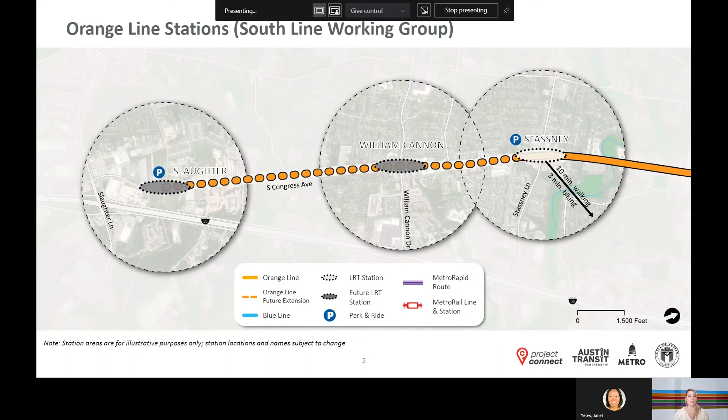After this slide, Janet is going to take over screen sharing and walk you through the engineering schematics for the South Line section. Schematics are a technical tool used by the engineering team to develop the design.

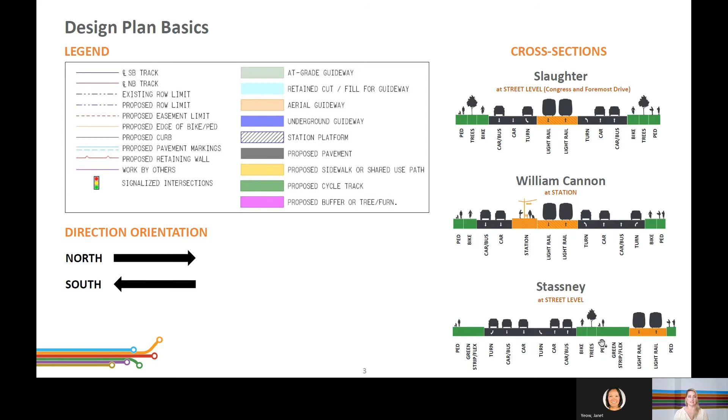All right, so as Gabby mentioned, the beginning of the Orange Line project and the South Line starts north of Ralph Ablanedo Drive. Just to orient ourselves, north is again to the right side of the page, south is to the left.

The northbound tracks are indicated here in the red line, southbound tracks are in the blue. You'll see that the tracks are actually offset from the center of the road, with the Slaughter Station in between the tracks. The reason the tracks are offset from the center of the road is to better integrate with the future park and ride location.

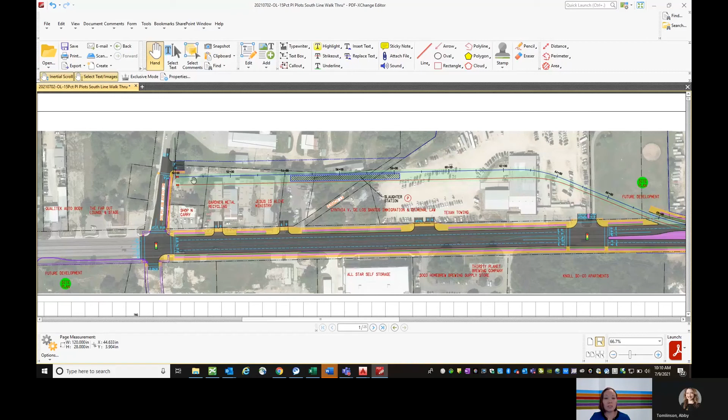Again, the park and ride location is not yet fixed. We are aware of the rapidly changing real estate environment, especially in this area, and that there's a future development on this property. Whenever you see a green circle with a site plan note, this indicates that there is a development already in progress on the properties, for example here and here. So as we move forward in our designs, we are going to adjust our alignment to avoid the future developments as much as we can.

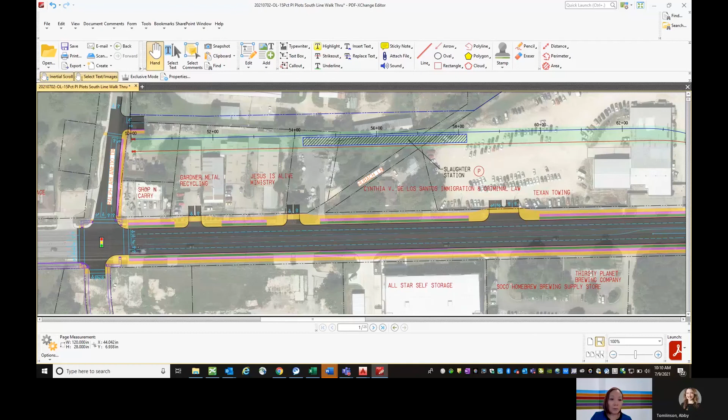On South Congress, you'll see that we are proposing full roadway improvements. However, we will maintain the current lane configuration of 2 northbound, 2 southbound, and a center turn lane.

As we head north on the project, the tracks veer back into the middle of the road. It will be at grade, meaning at the same level as the road. I want to point out that all driveways on the project will be maintained.

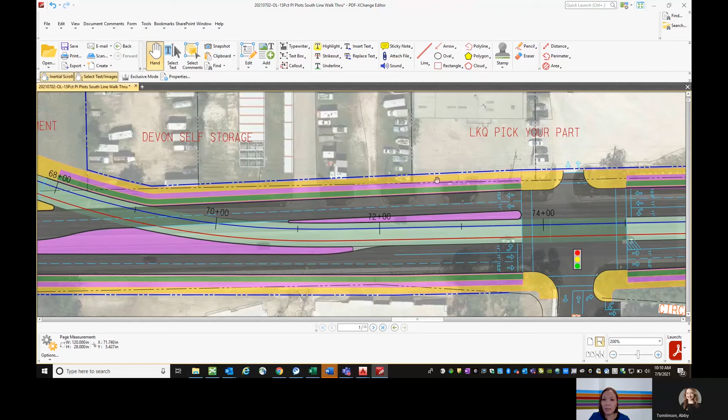In this area, we are proposing a full dedicated bike and pedestrian facility. The green indicates the bike lane, the pink is the tree and furniture zone, and the yellow is the sidewalk. As you'll see in this section, we have a full bike lane, tree furniture zone, and sidewalk on both sides of the road.

So as we head north, the tracks are maintaining at grade in the center of the road. There'll be a signalized intersection at Foremost Drive. Heading north, the tracks remain in the center of the road.

As we cross South Boggy Creek right here, the tracks actually have to raise up to cross over the creek to clear the 100-year water surface elevation. Let's go to the profile to show you. The dashed black line is the existing ground, the blue line is the profile of the track and the roadway. You'll see here that the tracks go up over Boggy Creek. This will be a proposed bridge, and we are elevating to clear that 100-year water surface elevation. The green area indicates retained fill.

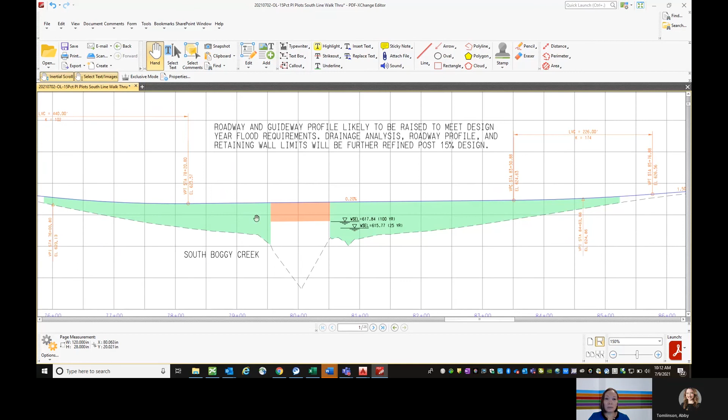Going back to the plan, you will see this red line with a V-notch that indicates the limits of the retaining wall. You'll see it on both sides. As we progress in our designs, we will of course reduce as much as we can the limits of the retaining wall.

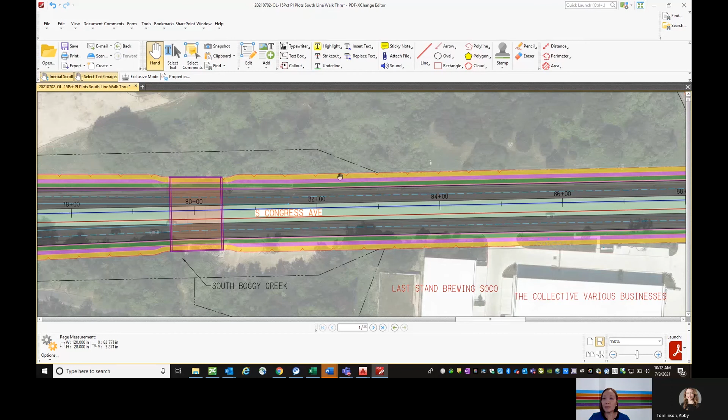We are going to maintain driveway access to this Last Stand Brewing Company and this area. Heading north, Dittmar Road is going to be a right in, right out. This means that cars can no longer cross the tracks. In order for them to access southbound Congress, cars would have to turn right on Congress, head to the next nearest intersection, and make a U-turn.

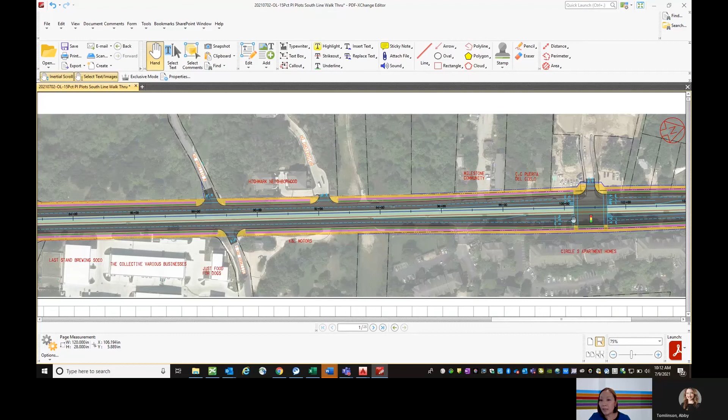The tracks remain in the center of the road at grade. Again, full dedicated bike and pedestrian facilities on both sides of the road.

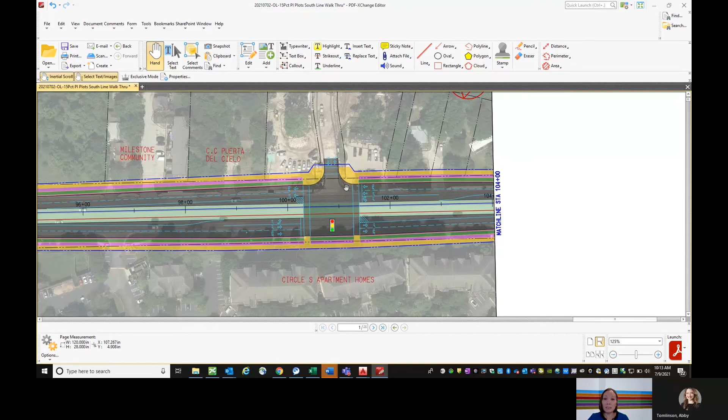At this intersection, we are proposing a new signalized intersection due to a new multi-family development here. Based on our traffic study, there was enough traffic to warrant a signalized intersection, which also provides an opportunity for pedestrians to cross safely.

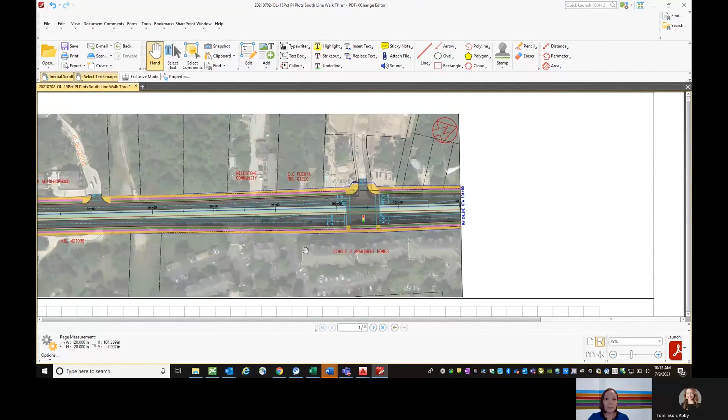Heading north on South Congress, the tracks are in the center of the road with full dedicated bike and ped facilities. Algoin Street is going to be a right in, right out, similarly with Cloudview and Meteor.

So for folks from Centennial Place Apartments who want to access southbound Congress from the northbound side, they would have to turn right on Congress and make a U-turn at William Cannon.

As we head to William Cannon, we are proposing the William Cannon Station. It is going to be a split platform, meaning there's going to be a platform on either side of the intersection, and the footprint widens out to accommodate this platform.

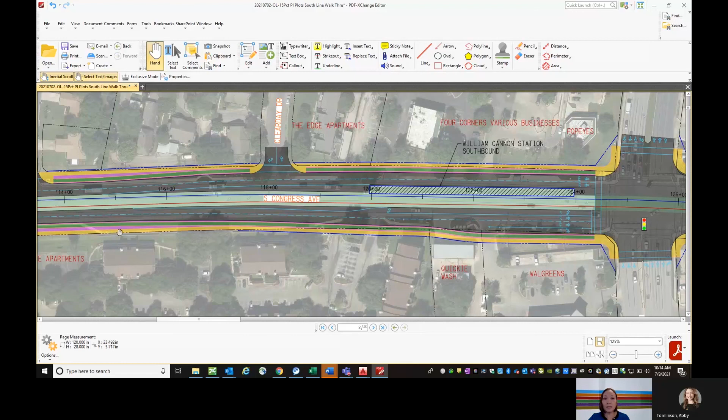In this area, due to this widened footprint, we reduce or eliminate the tree furniture zone, shown in pink, to reduce impacts on the adjacent properties. So here we'll now have a bike lane followed by a 2-foot buffer area, followed by a sidewalk.

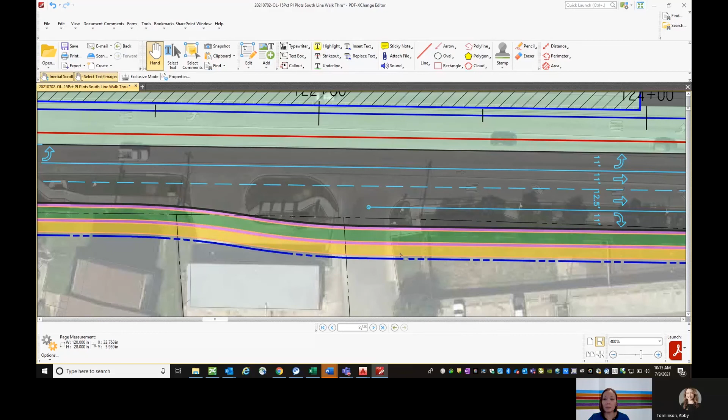To orient ourselves, the Pleasant Hill Library is to the bottom of the page here. Heading north, William Cannon is going to be a full signalized intersection as it is today.

The northbound split platform is indicated here in this dashed box. Again, because we are widening out for the footprint to accommodate this platform, we have eliminated the tree furniture zone, but we will still provide a fully separated bike and ped facility on both sides of the road.

As we head further north, the tracks remain in the center of the road, and we are maintaining full driveway access to all businesses on both sides of the road.

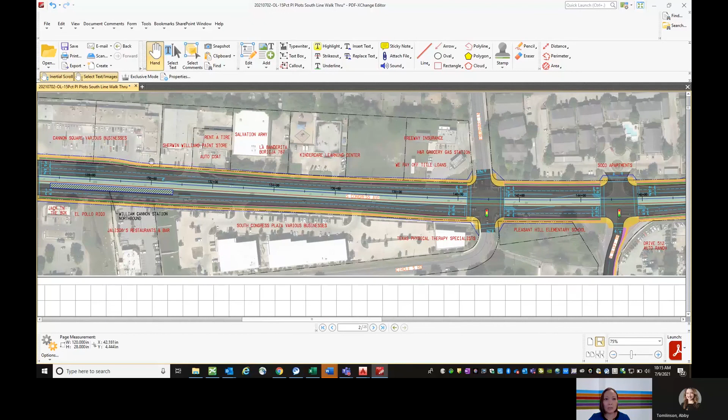Circle S Road is going to be a signalized intersection as it is today. This is Pleasant Hill Elementary School, and another full signalized intersection is being proposed here, with the tracks remaining in the center of the road at grade.

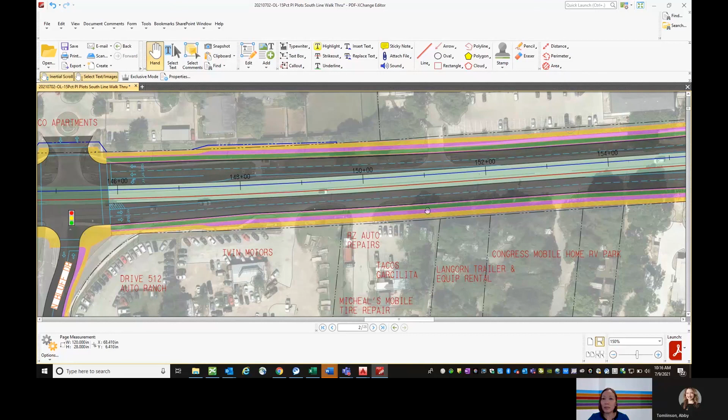As we head north, we are widening back out to provide the tree furniture zone since we have sufficient right of way to accommodate this wider footprint. So we'll have the bike lane followed by a tree furniture zone and sidewalk on both sides of the road.

Tracks remain in the center of the road as we head north. This is Society SoCo, a new development. So just to give an example, for folks from this apartment wanting to head southbound, they can no longer turn left across the tracks. They would have to head north to Little Texas and make that U-turn.

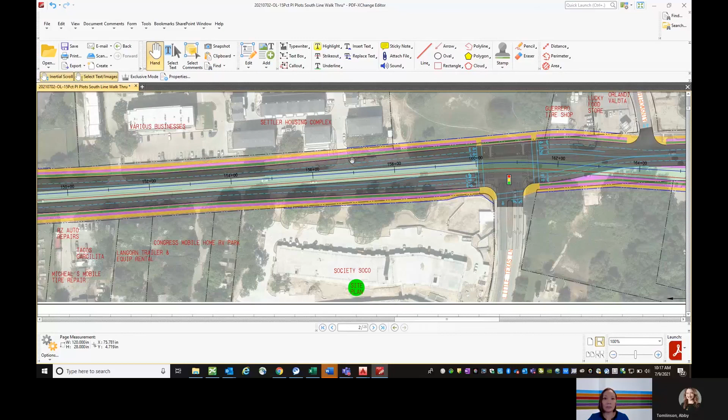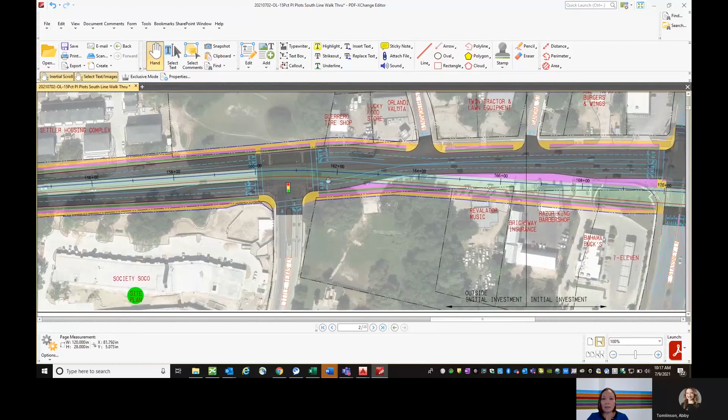Little Texas, we are maintaining the full signalized intersection. You'll see the tracks eventually veer off to the west side, and the reason we do that is to better integrate with the park and ride that we are proposing in this corner between Congress and Wasson.

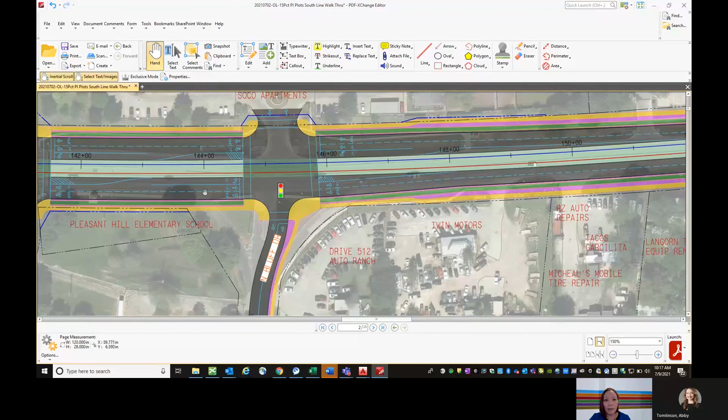I want to point out that at North Bluff, the current road configuration is what we call a slip lane, which is a very wide, Y-shaped intersection. But in our proposed condition, we are proposing a traditional signalized intersection, to provide a safer crossing environment for peds and bikes.

So in the current situation, peds would have to cross the slip lane at an unsignalized intersection, but in our proposal they can cross at a fully signalized intersection.

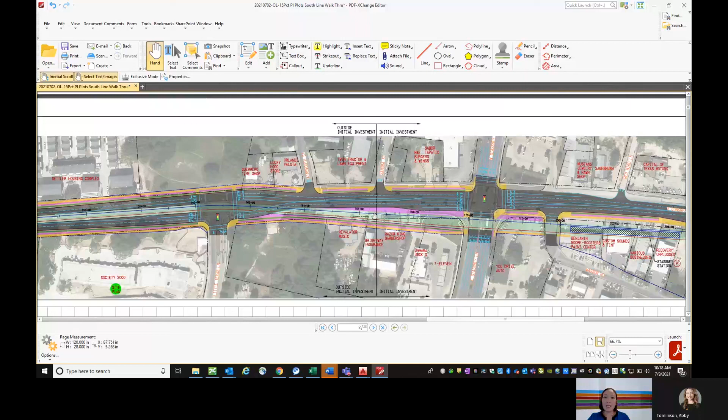The limits of the initial investment are everything north of Stassney, and this is the limit of the area of the South Line, which is outside of the initial investment. So I will turn it over to Abby now to provide a closing.